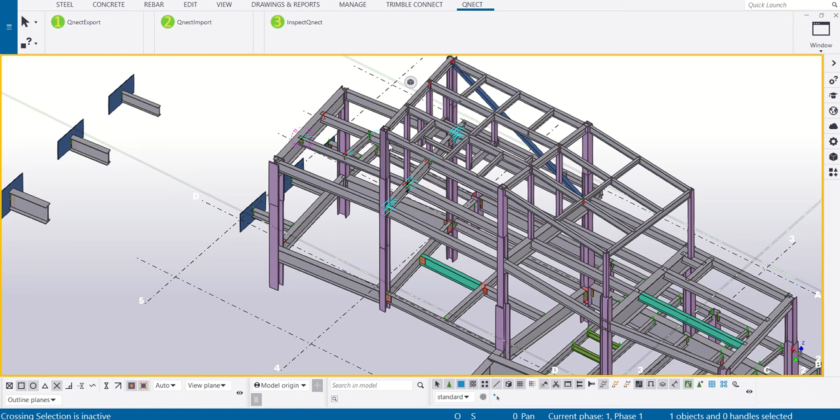In this video, we are going to take a look at the Qnect map drawings, how to create them, and what type of map drawings you can create.

So when you go to button number 3 and click on map, you will see 3 types of map drawings. First is connections map, second is doubler's map, and third is NoConnect map.

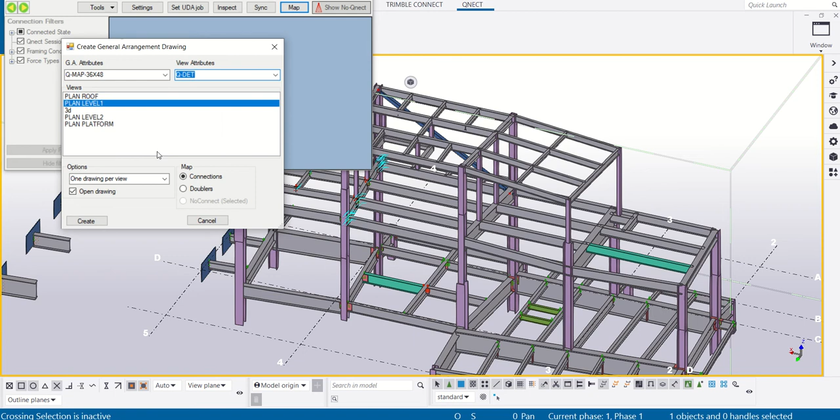I'll start with creating a map drawing for level 1. So I'll use a connections map. The drawing settings, I'll use Q-MAP. This is the size of the drawing, and Q-DET for the view settings. Then I'll click on create to create that map drawing.

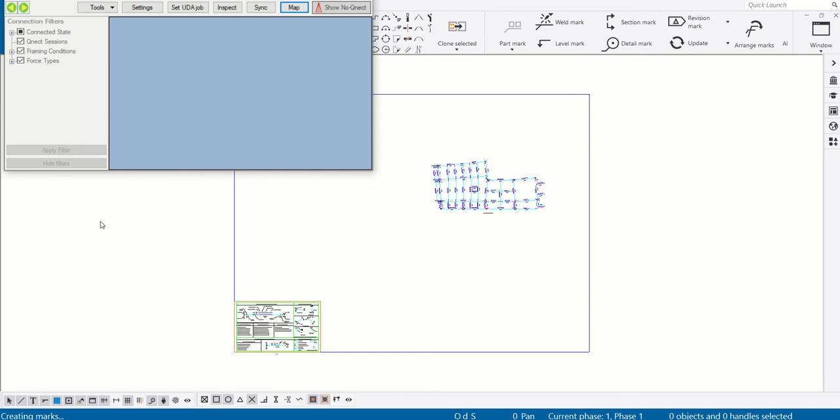Okay, the map drawing is created. Let's take a look. I'll increase the scale.

So if we look at this beam, for example, the beam size is W18 by 35, and you have at the top here the connection code, one in blue and one in magenta, and on the left side there is a symbol and numbers, and right side as well there is a symbol and some numbers.

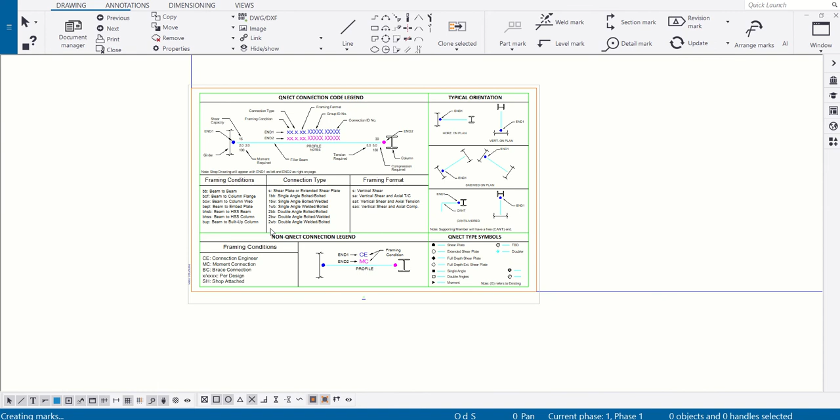To understand what those numbers mean and what this code means, there is a code legend here at the bottom left corner. In this code legend, you will find first the connection code at the blue end representing this end, and it has the framing condition divided into segments.

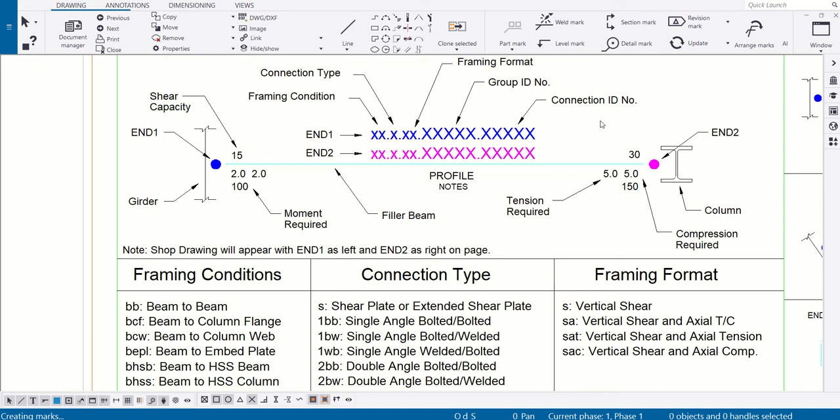The first is the framing condition, so BB means beam to beam, connection type S or 1BB or whatever, then the group number, then the connection ID number. So if we go back, BCW means beam to column web, SE means extended shear plate, S means shear only loads. 1209 is the group number, and the other number is the connection ID number.

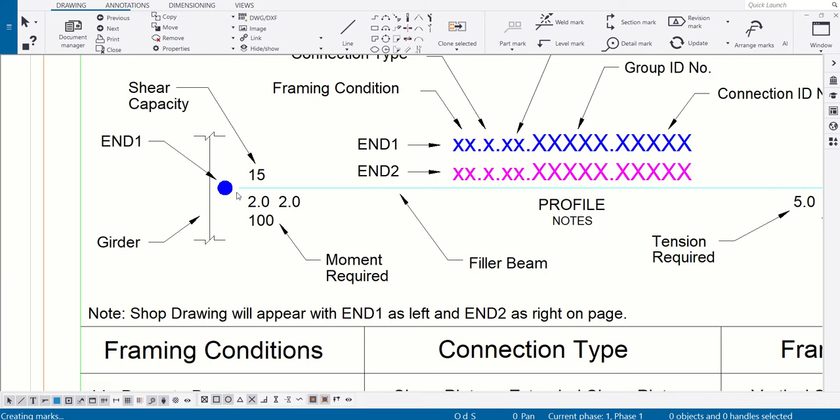Now let's take a look at the symbols, what those symbols mean. If it's a solid circle, it means shear plate. A hollow circle, extended shear plate. The square means full depth shear plate, etc.

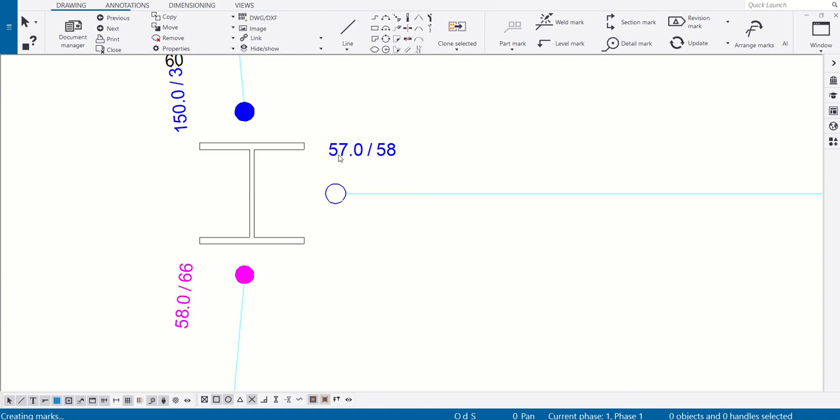So when you go back here, this is extended shear plate. The numbers mean the reaction and the capacity. So the reaction is 57 and capacity is 58. And that's how you read the connection map drawing.

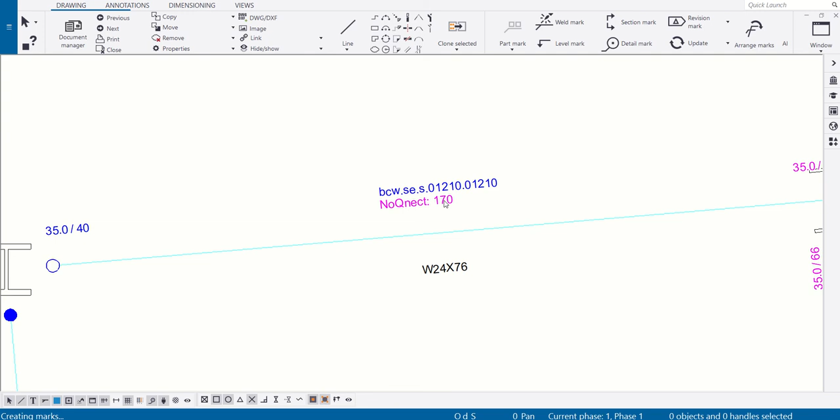It will also highlight locations where there are no connections. For example, this location here at the magenta end says NoQnect 170. This is the location of the NoQnect connection, or where Qnect was unable to design the connection. And this number 170 is the code number.

So this is the first type, the connections map drawing. The second type of map drawing is called doubler's map. I'm going to show you an example of a doubler. So this connection has a doubler plate.

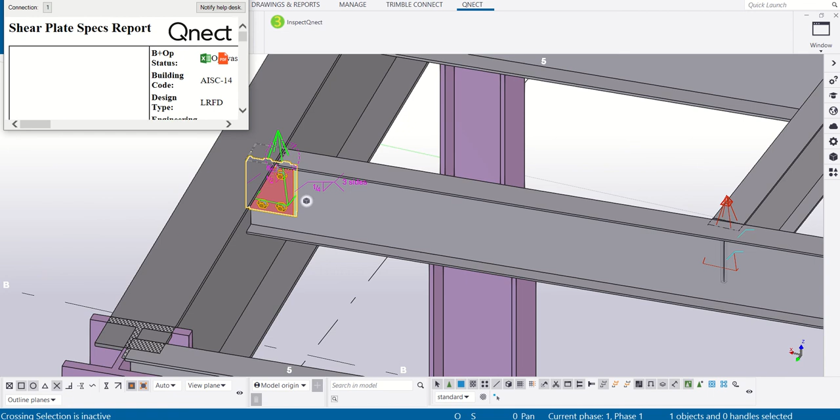If I double click and go to the doubler's report, it will show the beam size, the reactions, and beam capacity without doubler, and also the doubler plate dimensions, and choice 1 and choice 2 to avoid using doubler by upsizing the beam size.

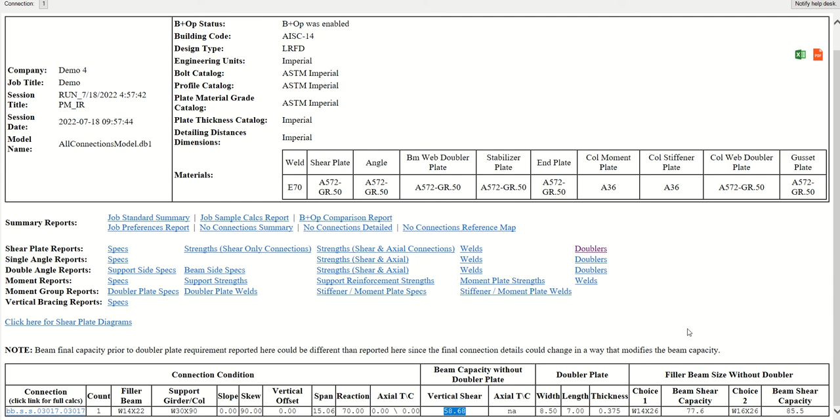So choice 1 is to upsize to W14 by 26 instead of W14 by 22. And choice 2 is to upsize to W16 by 26. So you can show this information of upsizing in the map drawing if you want.

And to do this, you go to button number 3, then map. I'll choose level 2. The GA drawing setting, I'll use Qnect doublers and Qnect doublers view. On the map type, I'll choose doublers. Then I'll click on create.

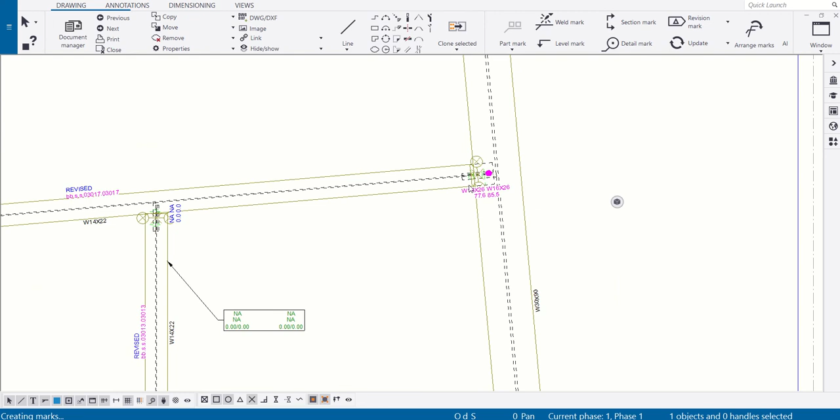Let's close this. So I'm going to zoom into the location where there is a doubler just to show you quickly. As you can see here, choice 1 and choice 2 to avoid using doublers are shown on the drawing at the particular end where there is a doubler.

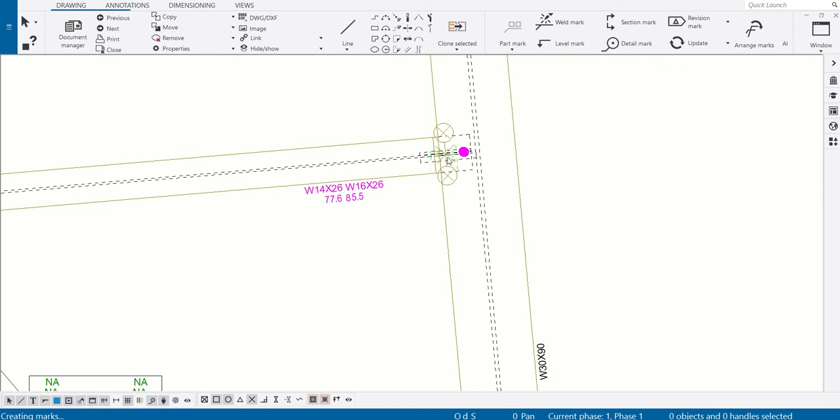So this is the second type, the doubler map drawing. The third type of map drawing you can create is called the no connections map, and this will only highlight the locations where there are no connections, like this one.

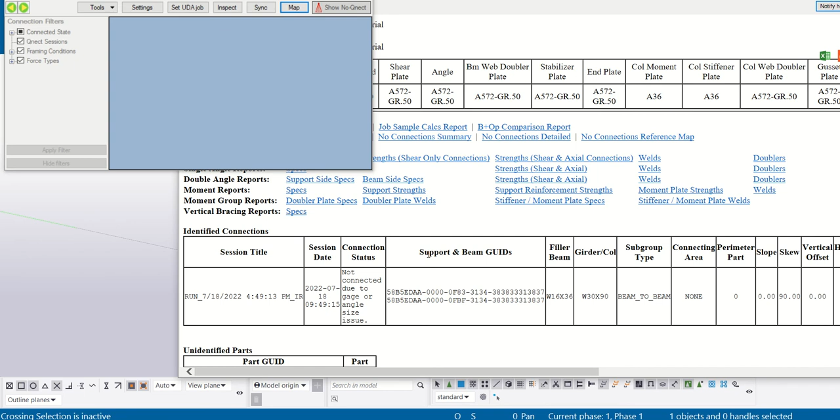If we double click this red cone here, it will show the reason why this connection was not designed under the connection status. And there's another here. Any red cone with no connection, it will highlight it. For this example, this one is framing condition not yet supported by Qnect because it's a beam to beam connection.

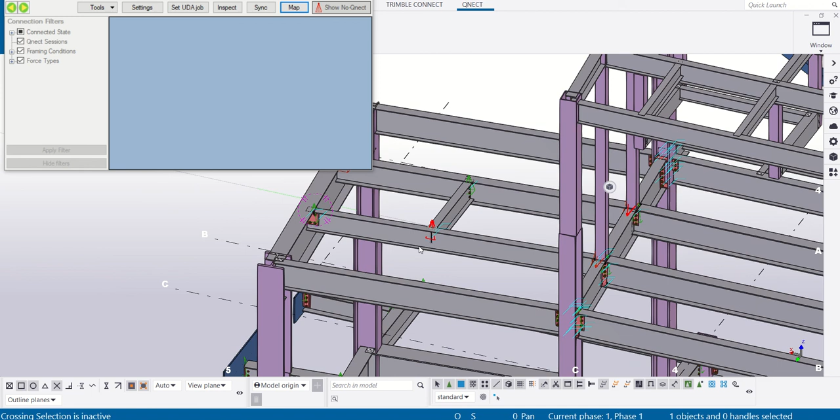To create the no connection map, first you go to inspect. This is different, not like the other maps where you go directly to the maps button. You go to inspect, and you need to go to no connection reasons and check all the reasons, then click on apply.

Then you go to map. I'm going to use plan level 2 and No-Qnect selected. So you can choose which NoQnect reason to include or not include by doing this check.

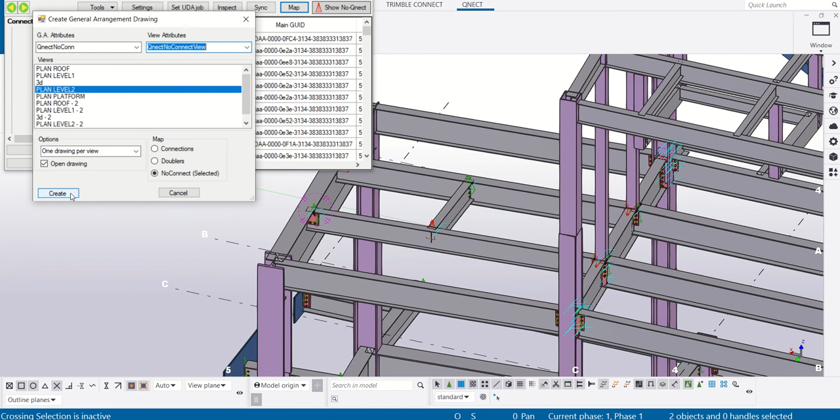Those numbers, we have a list of the number and what it means, so you can compare against this list. I'm going to highlight all of the cases, and I will use Qnect no conn in the drawing settings and Qnect no connect view and no connect map drawing type. Then I'll click on create for level 2.

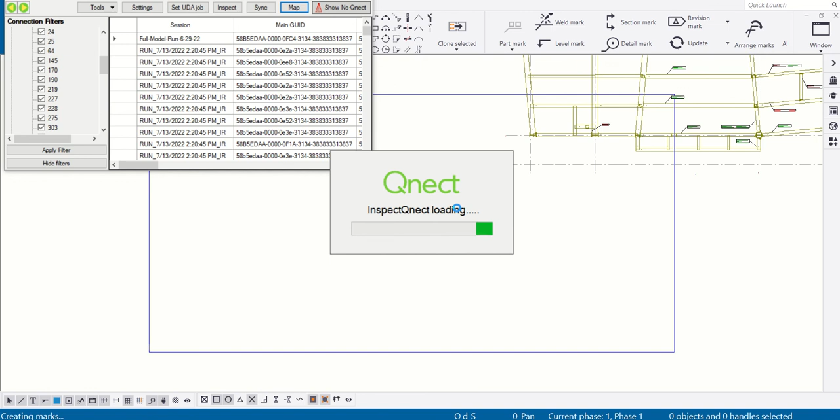Okay, so this map drawing will highlight the no connect at each end. So this is no connect 344. This is no connect with code number 24.

So if there are other no connects, like this one, no, there are connections here. This one, no connect 24. And this one is 344, only those two connections.

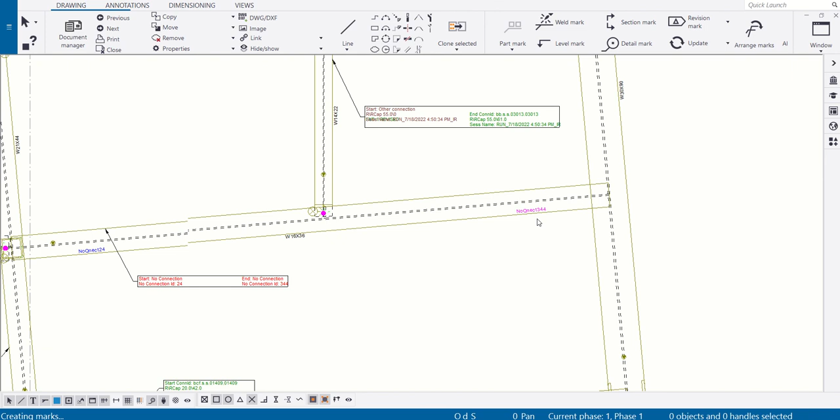And that's how you can create the no connect map drawings.